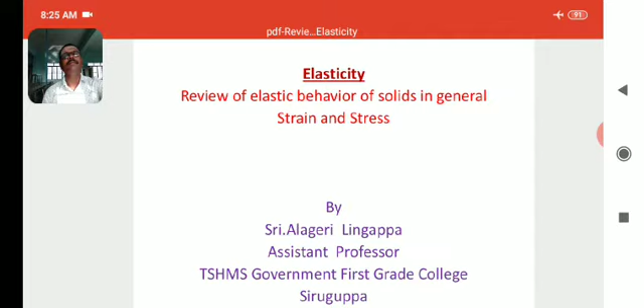Elastic bodies have the property of elasticity. Rigid bodies have the property of rigidity. Plastic bodies have the property of plasticity. So now come to the point: elasticity.

Elasticity is the ability of a body to resist any permanent changes to it when stress is applied. The body regains its original shape and size when stress application ceases. Here the stress is nothing but force per unit area. If external force is applied to a body, the body resists a permanent change, and regains its original shape and size when the stress is removed.

All materials have an elastic limit beyond which, if continuous stress is applied, they will start losing their ability to exhibit perfect elastic behavior and start deforming. In contrast, plastic deformation is the non-reversible deformation of solid materials on the application of forces.

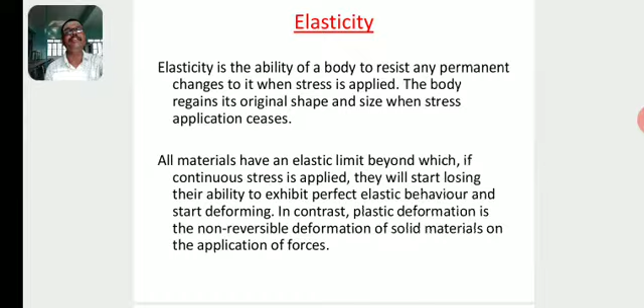Looking at elasticity at the atomic level, solids are made up of atoms or molecules. They are surrounded by other such atoms which are held in a state of equilibrium by interatomic forces. When an external force is applied, these particles are displaced, resulting in the deformation of the solid. When the deforming force is stopped, interatomic forces drive the atoms to regain their state of equilibrium.

That means all solids are made up of atoms or molecules. Each atom is surrounded by other such atoms. Under normal conditions, all the atoms are in an equilibrium state. When an external force is applied to a solid, the atoms or molecules are displaced, and the solid can change its shape or size.

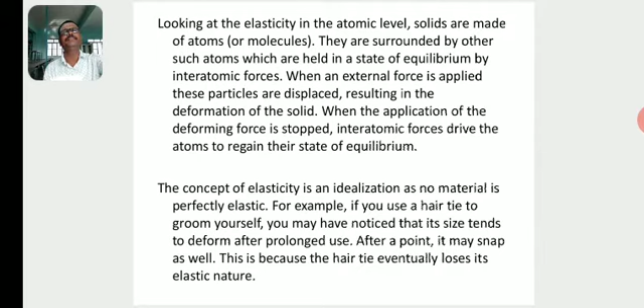So, important points on elastic behavior of solids. An elastic body is one that regains its original shape and size when deforming forces are removed. A plastic body is one that succumbs to deforming forces, however small, and cannot return to its original shape and size. Elasticity is the property of a body to regain its original shape and size when deforming forces are removed; it exhibits an opposition to change.

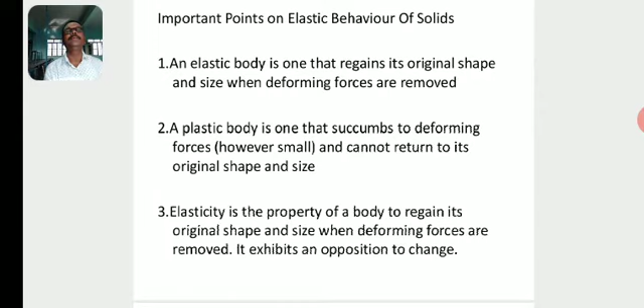So now we discuss elastic stress and strain. What is stress? What are the different types of stress? What is strain? What about the different types of strain? When the body is deformed by the application of external forces, forces within the body are brought into play. Elastic bodies regain their original shape due to internal restoring forces. The internal forces and external forces are opposite in direction.

If a force F is applied uniformly over a surface of area A, then the stress is defined as the force per unit area. When external force is applied on the elastic body, at the same time, a restoring force is generated inside the elastic body, which is equal and opposite to the external applied force.

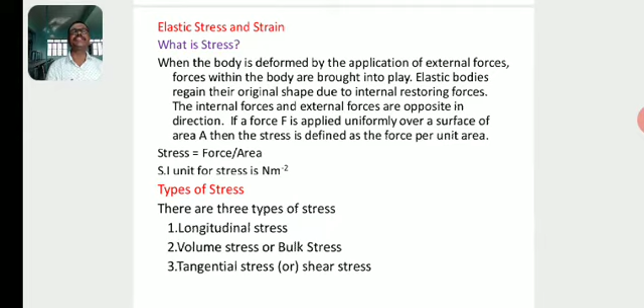So, longitudinal stress. When the stress is normal to the surface area of the body, and there is a change in the length of the body, it is known as longitudinal stress. If a force is applied to an elastic body and its length changes, then the restoring force generated inside the body per unit area is known as longitudinal stress.

Again, it is classified into two types: tensile stress and compressive stress. When a longitudinal stress is produced due to an increase in the length of the object, it is known as a tensile stress. Longitudinal stress produced due to the decrease in length of the object is known as a compressive stress.

Again, there are two stresses, a tensile stress and a compressive stress. In case of tensile stress, the length of the body increases, but in case of compressive stress, the length of the body decreases.

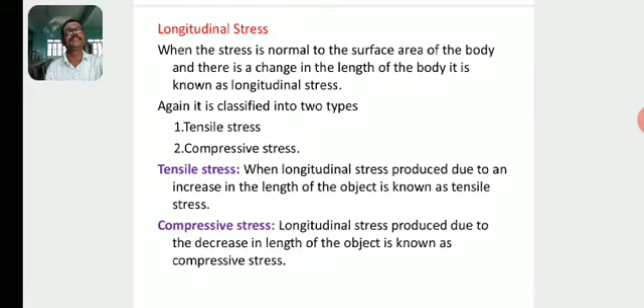Volume stress or bulk stress. If equal normal forces applied to the body cause a change in volume of the body, the stress is called volume stress. Again, stress is force per unit area. Its SI unit is Newton per meter square.

Then tangential stress. When the stress is tangential or parallel to the surface of the body, it is known as tangential or shear stress. Due to this, the shape of a body changes, gets twisted. So, longitudinal stress or linear stress, then volume stress or bulk stress, then tangential stress or shear stress. So these are the different types of stress.

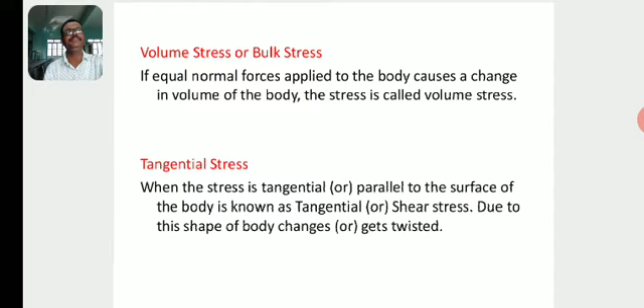Then what is a strain? A body under stress gets deformed. The fractional change in the dimension of a body produced by the external stress acting on it is called strain. The ratio of change of any dimension to its original dimension is called strain. Since strain is the ratio of two identical physical quantities, it is just a number. It has no unit and dimension.

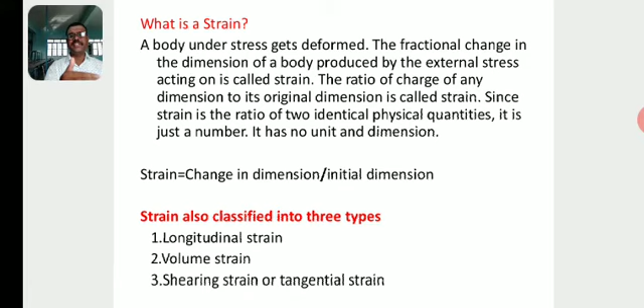So it is defined as the ratio of change in dimension to the original dimension, which has no unit, a unitless quantity, and no dimension, a dimensionless quantity. Strain is also classified into three types: longitudinal strain, volume strain, and shearing strain or tangential strain.

So longitudinal strain. The strain under longitudinal stress is called longitudinal strain. Longitudinal strain is equal to change in length of a body by initial length of the body. Let delta L be the change in length of a body and L the original length; delta L by L gives longitudinal strain.

Then volume strain. The strain caused by the volume stress is called volume strain. Volume strain is equal to change in volume of the body by original volume of the body. Let delta V be the change in volume and V the original volume; delta V by V gives volume strain.

Shearing strain, or tangential strain. When a deforming force is applied to a body parallel to its surface, its shape changes. This is known as shearing strain. The shearing strain can be represented by phi: tan phi is equal to displacement of the upper face by the distance between the two faces, the distance of the lower face from the upper face.